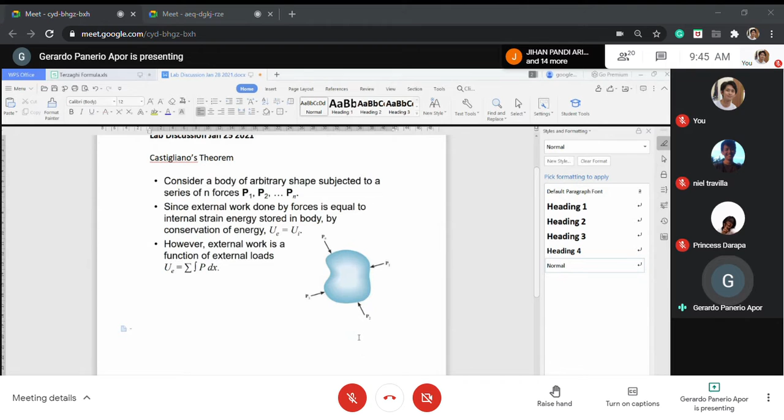So we have here a body, color blue, subjected to a number of arbitrary forces, such as P1, P2, up to P sub n. Now we are going to consider the external work here.

The external work done by these forces is equal to the internal strain energy stored in the body. So as long as there is external work done on it, there's also internal strain energy stored in the body. There is transmission from external work to internal strain, just like our human body: if we do external work, we will have some internal strain energy stored in our body.

Now, by conservation of energy, the external work done is equal to the internal work done. However, external work is a function of the external load. So, based on the simple equation, U subscript E is equal to U subscript I.

So the first equation, U sub E, is already defined, because this is what we call the external work, and this is a function of external load, such as P1, P2, P3. So in simple equation, it is the integral of P dx, because force times distance is work. P times the integral of dx equals work.

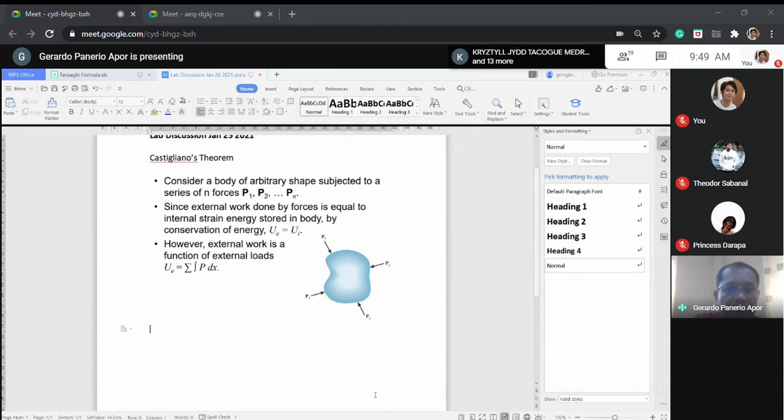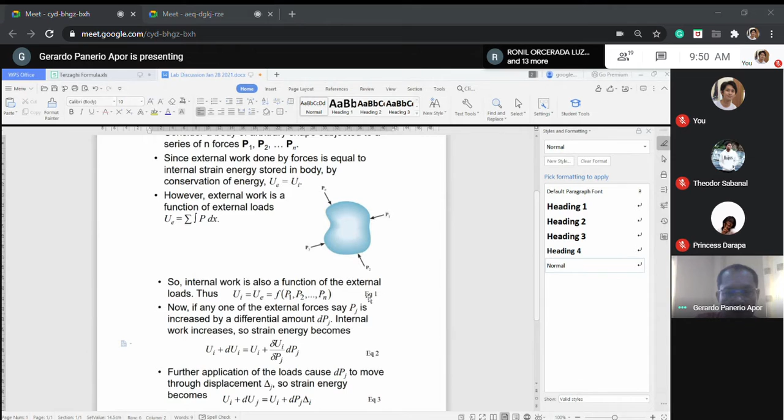So the internal work is also a function of the external load. Thus, U sub I equals U sub E equals a function of P1, P2, Pn. So that is equation 1, which I put on the right side.

Now, if any one of the external forces, say P sub j, is increased by a differential amount of dPj, the internal work also increases. So strain energy becomes U sub I plus dU sub I, or equals U sub I plus the partial derivative of U sub I with respect to P sub j, multiplied by dPj.

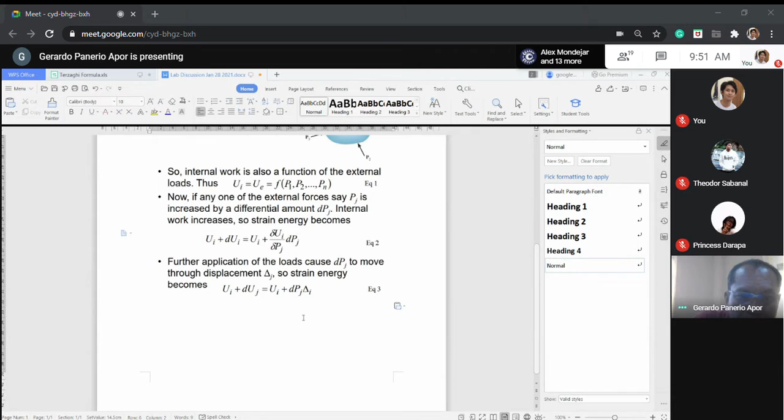Now, further application of the load causes dPj to move through displacement delta j. So strain energy becomes U sub I plus dU, or equals U sub I plus dPj times delta I. So you now have an equation for U sub I, which is the expression of increased internal strain energy. We will continue.

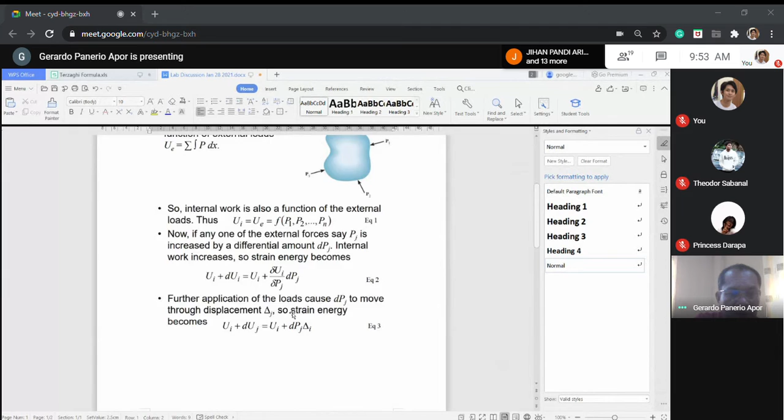So dUj actually becomes dPj times delta I, from this equation, because U sub I on the left side of the equation from equation 3, and the U sub I on the right side of the equation, both cancel, leaving only dUj equals dPj times delta I. This is the additional strain energy caused by dPj, the increase of the external load dPj. Here we try to increase by an amount dPj, and we see what the change in internal energy will be.

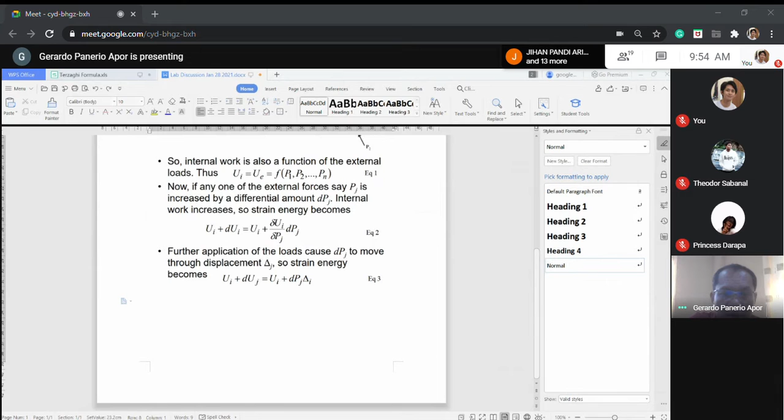This one will be equation 3. Okay, I think this one is workable. Actually, I'll just erase the 14 because that's from the book.

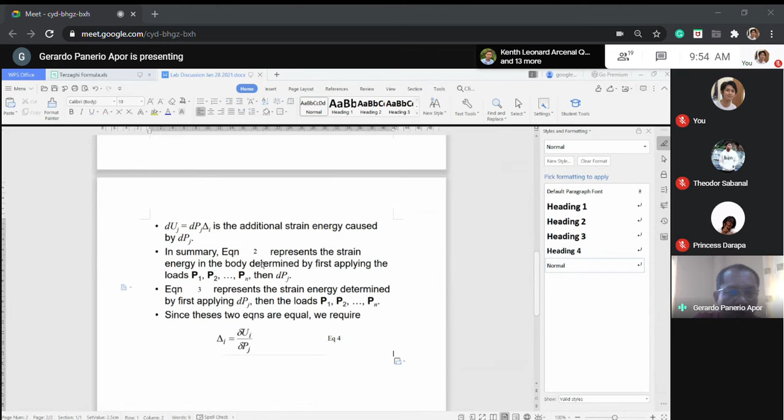So in summary, equation 2 represents the strain energy in the body determined by first applying the loads P1, P2 up to Pn, then the increase of that external load. Equation 3 represents the strain energy determined by first applying dPj, then the loads P1, P2, Pn.

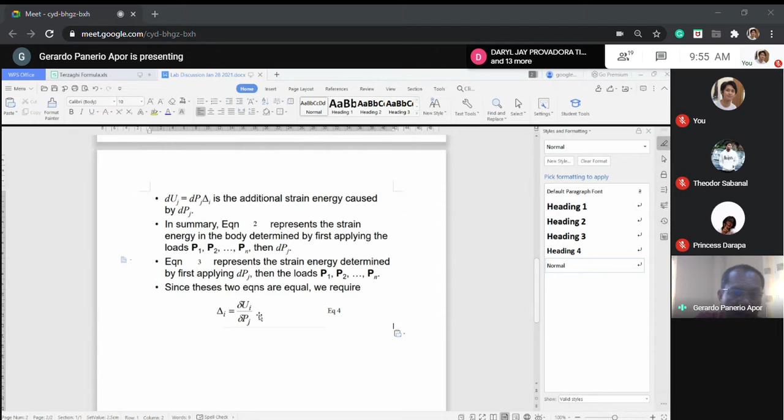Since these two equations are equal, require that delta I equals to partial of Ui over partial of Pj. So this is equation 4. I think this is now the Castigliano's theorem. Okay, so I will.

Okay, so it says here that equation 4 is a statement regarding the body's compatibility requirement since it's related to displacement. So the derivation requires that only conservative forces be considered for analysis.

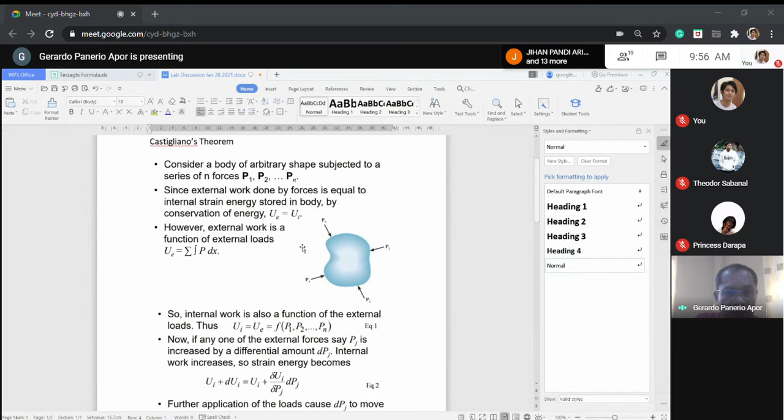Okay, so we go back. We have a body applied with a force. So we apply the conservation of energy such as external work is equal to internal work. So you have equation for the external work and for the internal work.

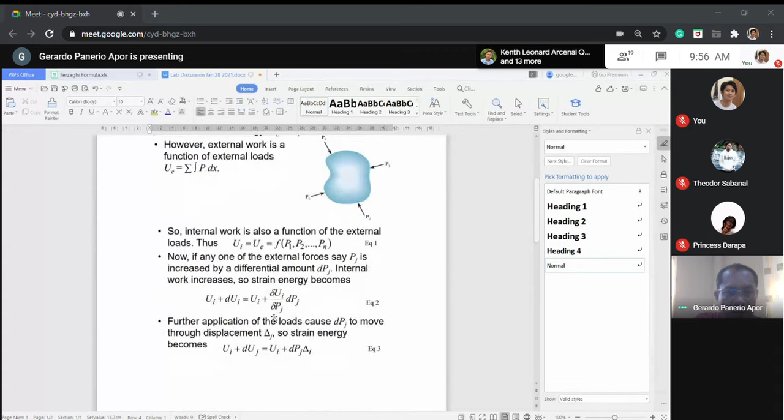And then they also apply the derivation by increasing the amount of differential force, so there's also a corresponding increase in the strain energy. That involves derivatives, that's why you see a lot of delta here. That means that we are applying derivatives.

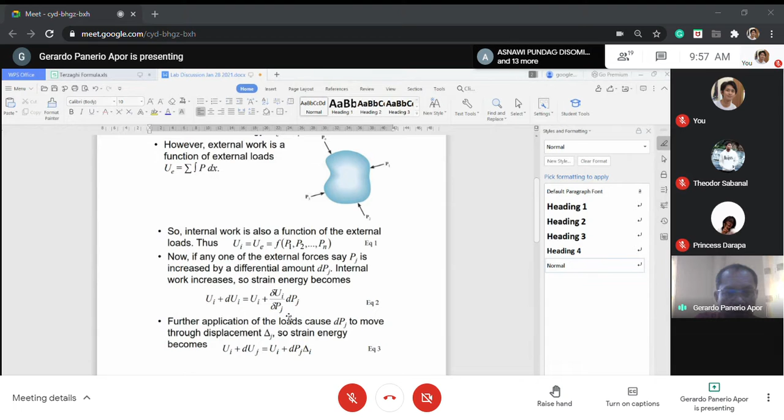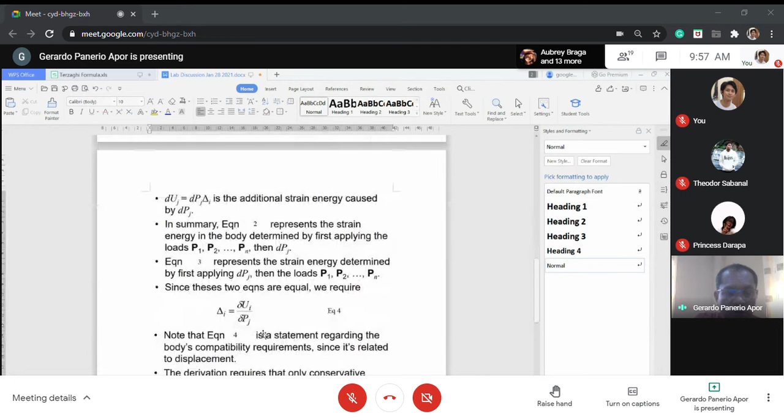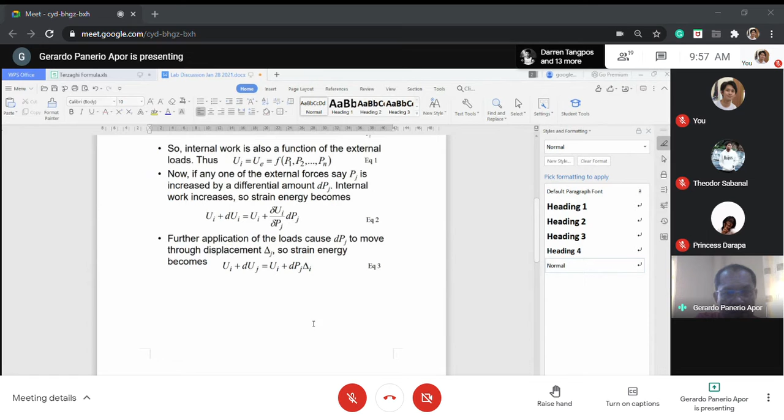So from this somewhat long equation, we will have only a simple equation in terms of equation 4. So this one is simpler to look at rather than this equation. But if you notice the equation, so many terms will cancel. So we have equation 4, which is a statement regarding the body's compatibility requirements.

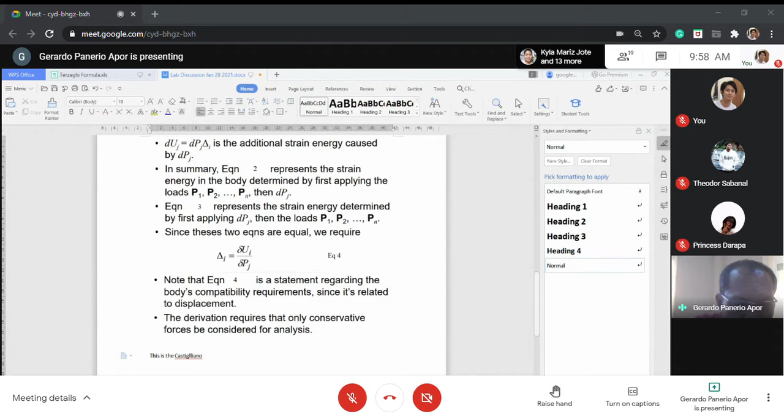We continue. Okay, this one is known as the Castigliano's Theorem. So this is the Castigliano's theorem. Castigliano's theorem, okay, so the equation 4.

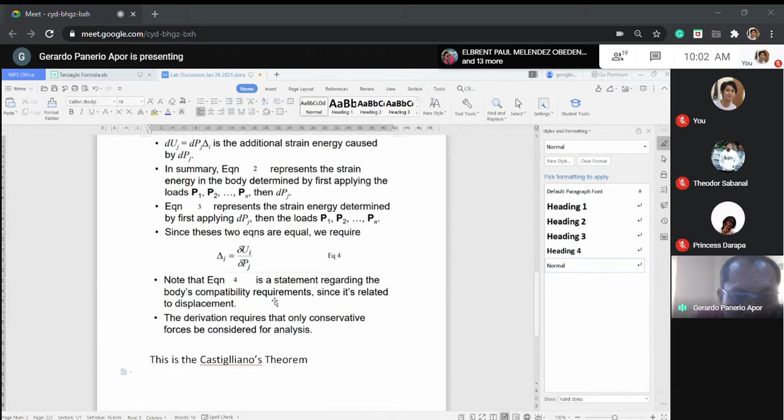Okay, so this is the Castigliano's theorem. So we can apply this actually to the truss. Application of it, for example, deflection of truss. Deflection of truss is one of the applications of the Castigliano's theorem.

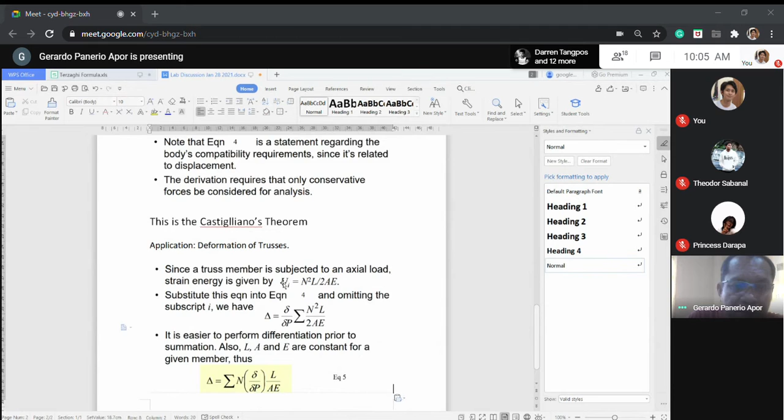The internal energy in the truss becomes axial, and that equals Ui equals N squared L over 2AE, no? Where A is the cross-sectional area. I will define here: A is the cross-sectional area of truss, area of truss member.

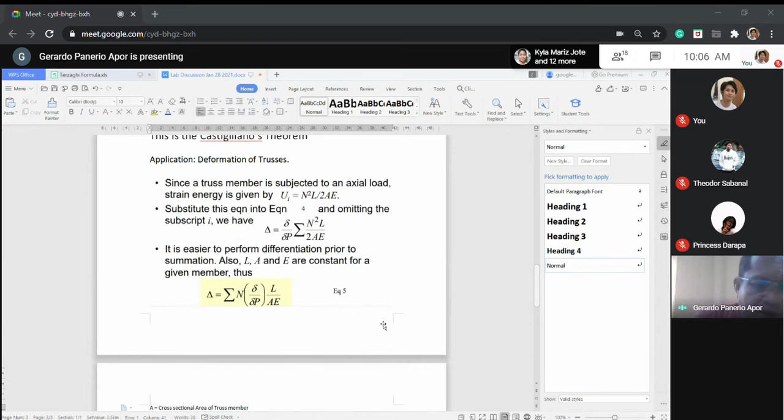Now we assume that all members have the same area, so that's why only one A is used, and E is the strength of the material, no? Which is usually defined as the modulus of elasticity of the truss member, whether it's made of wood or made of steel.

And we have also in here, what is that N? Let me see what that is. Another term there is L, as the length of the truss member. So the length of the truss member is L, E is the modulus of elasticity, and A is the area of the truss member.

Okay, how about the term N? What is that N? Okay, I think that's the force, no? So, okay, this is the formula. This is now the formula for the truss, no?

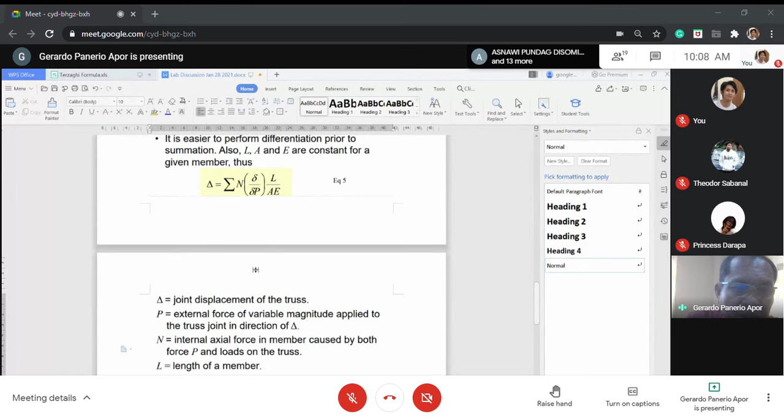So from this equation 5, delta is the joint displacement of the truss. P is the external force. So we will write equation 5 below, and the definition will follow.

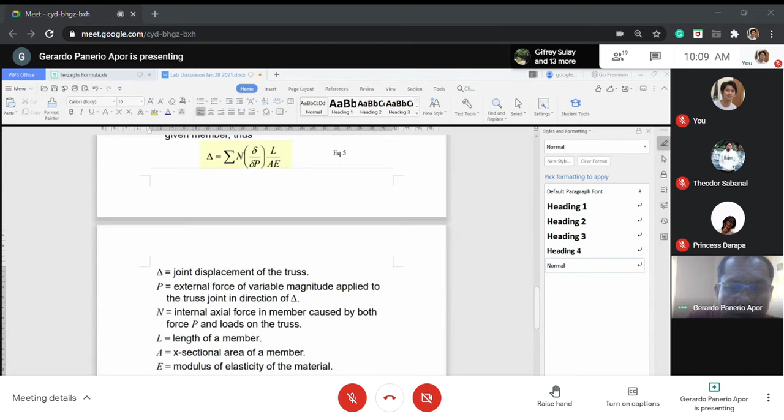Okay, so actually if we apply the partial derivative of the function with respect to P, the only thing that can be derived here is N, no? Because L, the area, and the elasticity are considered constant, so they will not change. So only the force, so only delta N over delta P, no? So what will happen is...

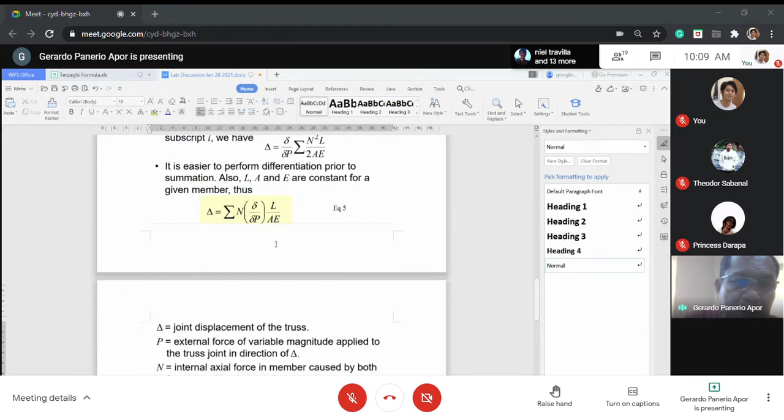So we can, okay. So there's another.

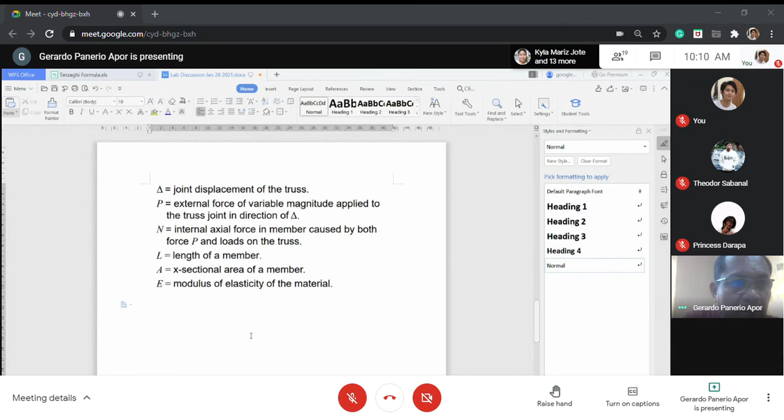Okay, so in order to determine the partial derivative delta N over delta P, because as I said, from this equation the only variable that can be derived is N, not L, not A, not E. So we need delta N over delta P. So N is the internal axial force in the member caused by both the force P and the load on the truss, no? That's N.

Internal axial force, no? So meaning we have to determine it before, using what's called the method of joints, no? Or method of sections, just to determine the internal force, no? Because N is the internal force.

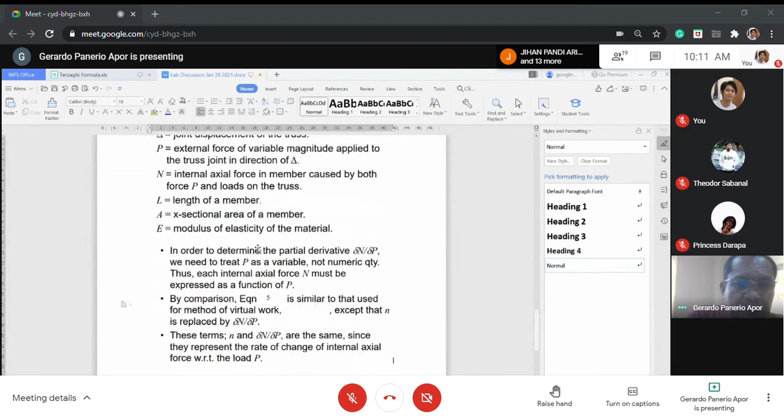P is the external force. So in order that we can determine the partial derivative delta N over delta P, we need to treat P as a variable, not a numeric quantity. Thus, each internal axial force N must be expressed as a function of P.

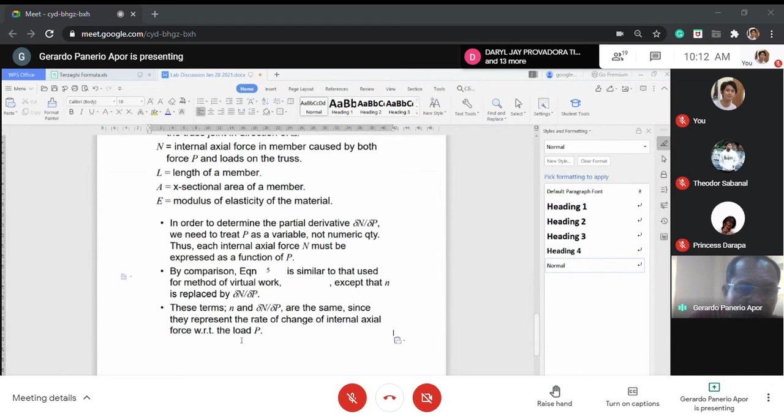By comparison, equation 5 is similar to that used for the method of virtual work, except that n is replaced by delta N over delta P. These terms, n and delta N over delta P, are the same, since they represent the rate of change of the internal axial force with respect to the load P.

Okay, so we continue. Okay, so we have the procedure for analysis. We have the procedure for analysis. Procedure for analysis, this is it.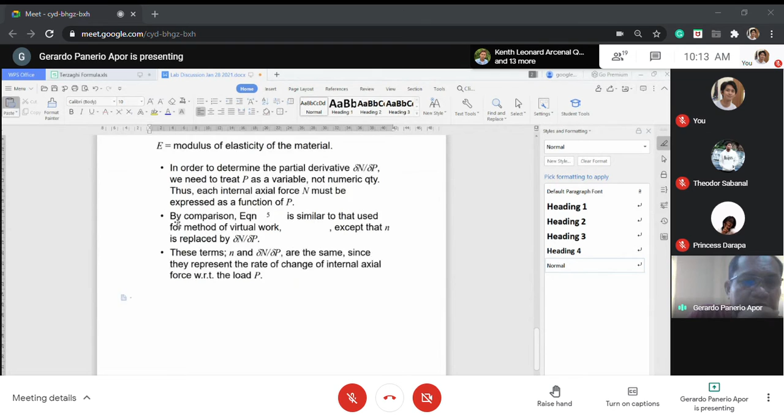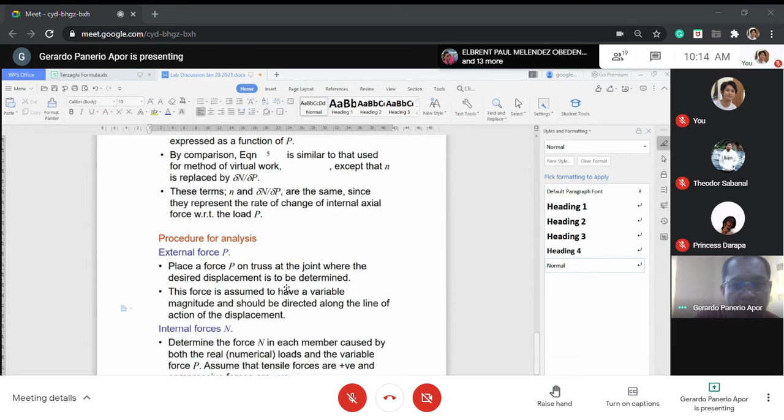Procedure for analysis: External force P. Place a force P on the truss at the joint where the desired displacement is to be determined, no? It's very important. This force is assumed to have a variable magnitude and should be directed along the line of action of the displacement. So not only is the force placed at the joint where you want to determine the displacement, but the direction of the force P is also the same as the direction of the desired displacement you are going to determine.

Okay, how about the internal force N? Determine the force N in each member caused by both the real numerical load and the variable force P. So there are two analyses to do, no? Determine the internal axial force in each member caused by, number one, the real loads, no? The real loads are the actual external loads.

And the variable load is the one that you place on the joint. The displacement is to be determined. What is the direction of the P? It is the same direction as the one you are going to determine.

So there will be two types of load. Number one is the real load, the one acting on the trusses. Number two is the P, which is actually a determinant force, just to determine the displacement.

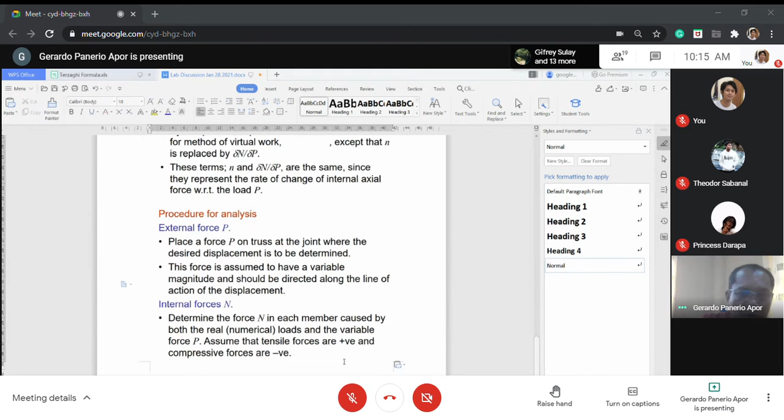So that's the procedure. I think we need to have an example. If we have an example here, we still have to continue with the procedure of analysis.

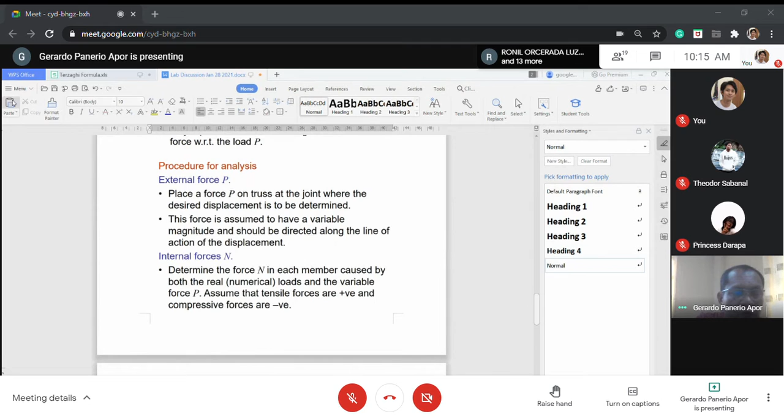So we continue. For the internal force, find the respective partial derivative delta n over delta P for each member. After n and delta n over delta P have been determined, assign P its numerical value if it has actually replaced the real force of the truss. Otherwise, set P equal to 0.

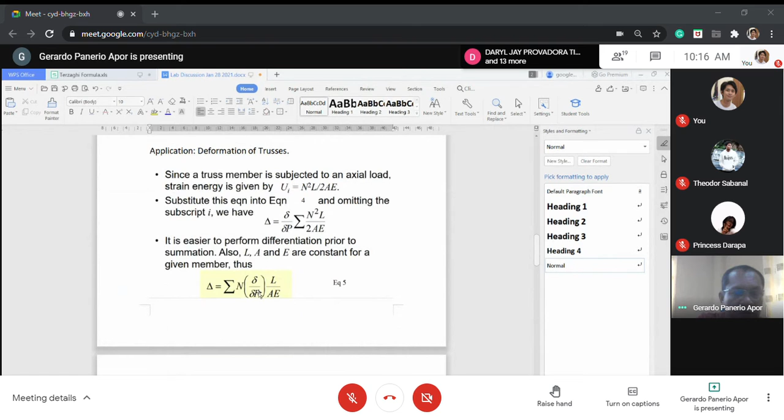This is known as the Castigliano Theorem. I don't know where is the first one, but we will come to that.

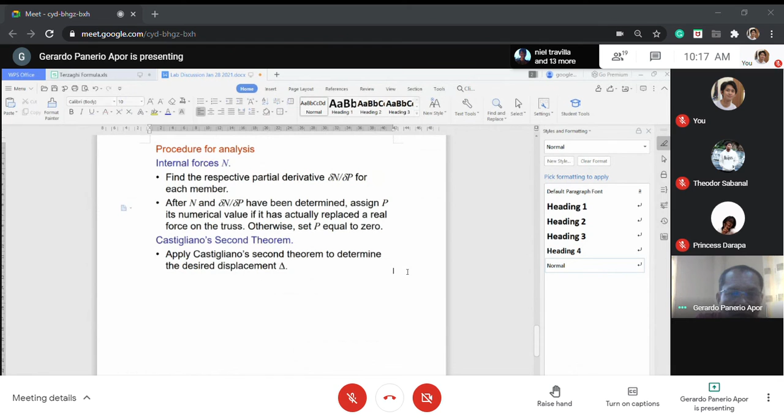Continuing, it is important to retain the algebraic sign for the corresponding value of n and the partial derivative of n with respect to P when substituting this term into the equation. If the resultant sum of n times delta n over delta p is positive, the displacement is in the same direction as P. If negative, the result is opposite to P.

That is the meaning, just like when we assume a positive sign in the method of joints when analyzing internal forces of truss members. The first thing, when we do a free body diagram of every joint, for members we haven't determined yet, we assume the arrow going away, meaning we assume them to be positive. If the result is positive, then that force is positive. If we get a negative, that means compression.

But the magnitude is okay, magnitude will not change if the sign changes. Only that axial force is directional, you have a tensile force and also a compressive force. So we can determine tensile and compressive force by its direction, because force is a vector.

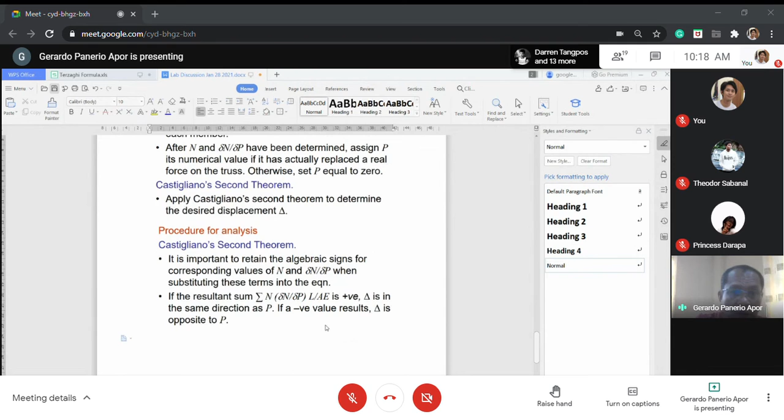So actually there's a lot here, but the most important is equation 5, because equation 5 is known as the Castigliano second theorem. That's what it's called, the Castigliano second theorem. We use this in determining the displacement.

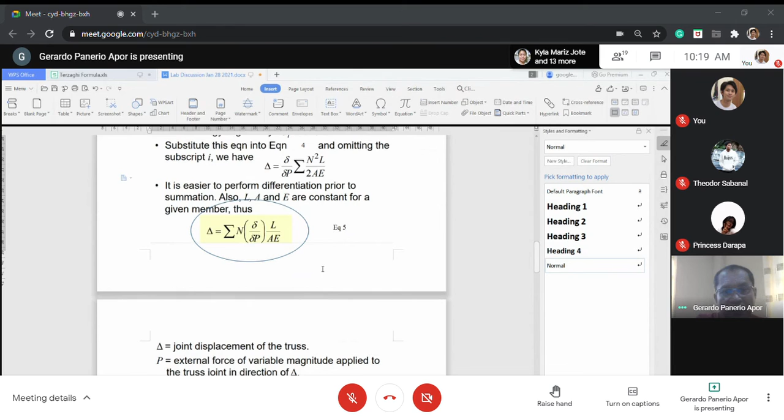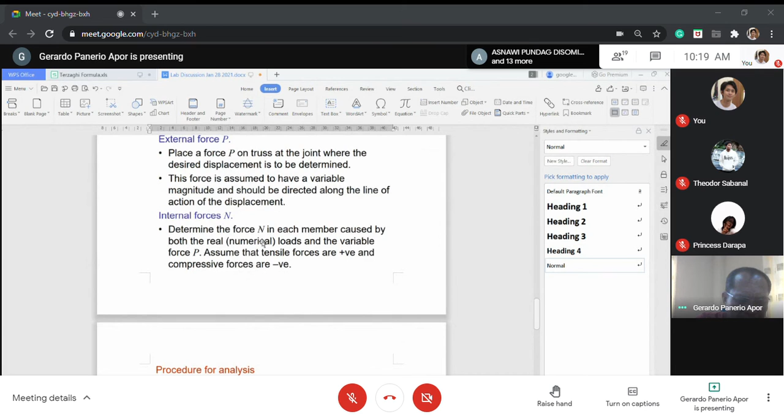But when you determine the displacement, you follow this procedure. This procedure is easier done than said, or easier said than done. It's like that.

So I think I need an example now, just like this one. Example number 16.

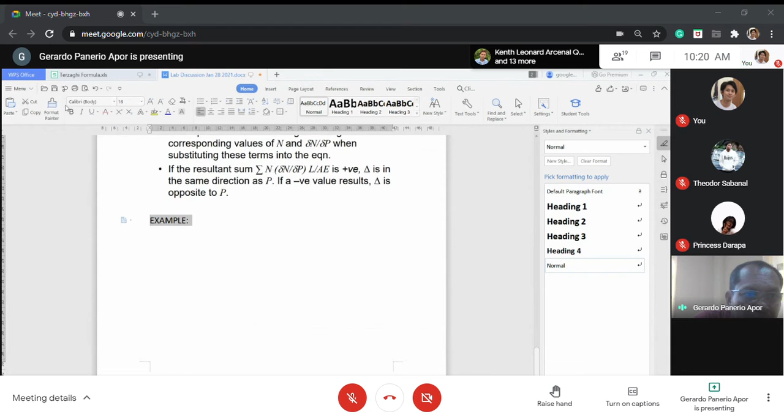Determine the horizontal displacement of joint C of the steel truss shown. Actually it has four members. The truss, I see, is all pinned connections.

Now the height of the truss is 4 meters from A to B, and A to D is 3 meters. So A to C is 5 meters because this is a 3-4-5 triangle: 3 horizontal, 4 vertical, the hypotenuse is 5 because 3 squared plus 4 squared is equal to 25, and the square root of 25 is 5.

Now the area of each member is different. You have a bigger area for AB and CD, while a smaller area for BC and AC. This means the areas of the truss members are not the same, but they are made up of the same material, with a modulus of elasticity equal to 210 gigapascal.

This is already gigapascal, 210, because Newton per mm squared is megapascal. Newton per meter squared is pascal. Kilonewton per meter squared is kilopascal. But when we say Newton per mm squared, that is megapascal. Now if we multiply this by 1,000, that will become kilonewton per mm squared, and kilonewton per mm squared is gigapascal. So that means this is 210 gigapascal.

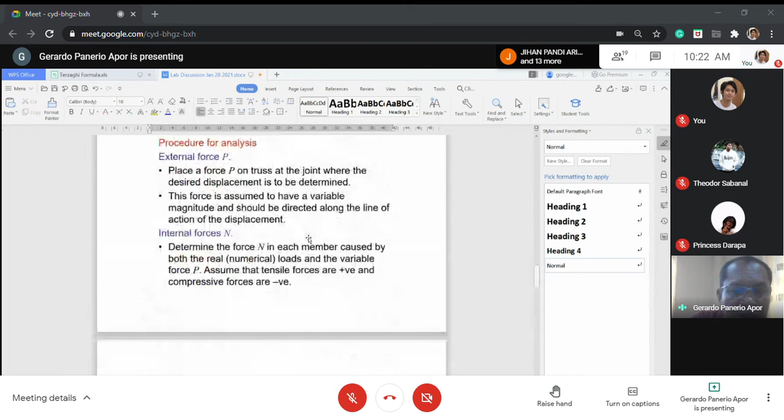To determine this, if you examine the formula, I will cut the formula here. So I'm going to consider this.

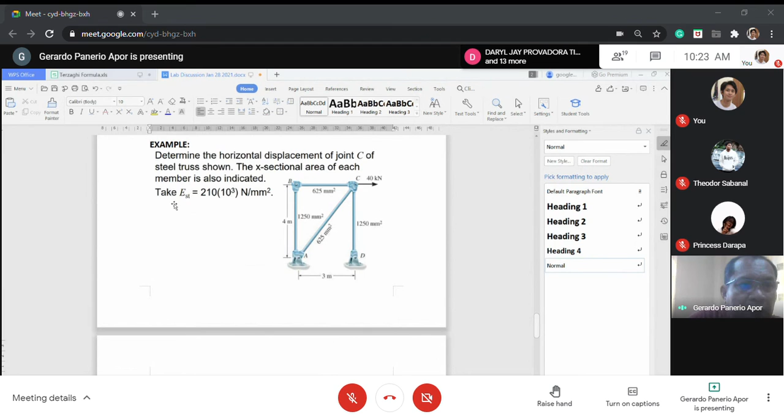That's how many there are, let's see it. So first you are going to determine the N, because you need the L, you need the area, you need the E. I think we need the...

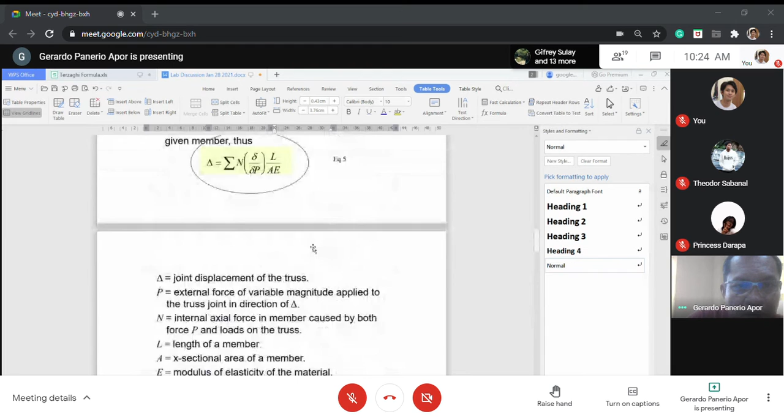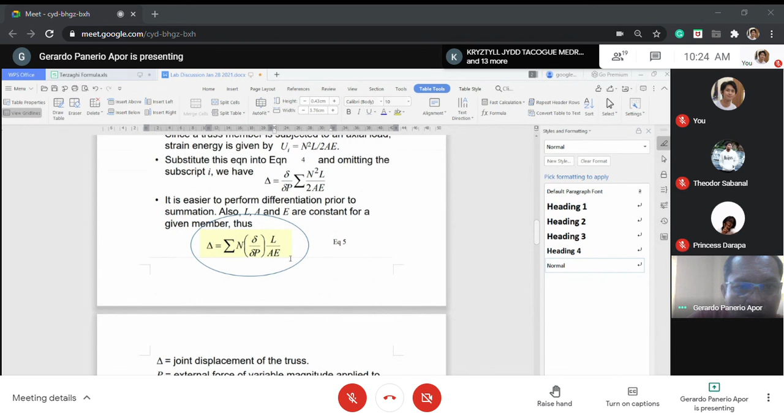I think this one is lacking, this equation is lacking. The equation that I posted is lacking. Inside the parentheses, it's supposed to be delta N, delta P.

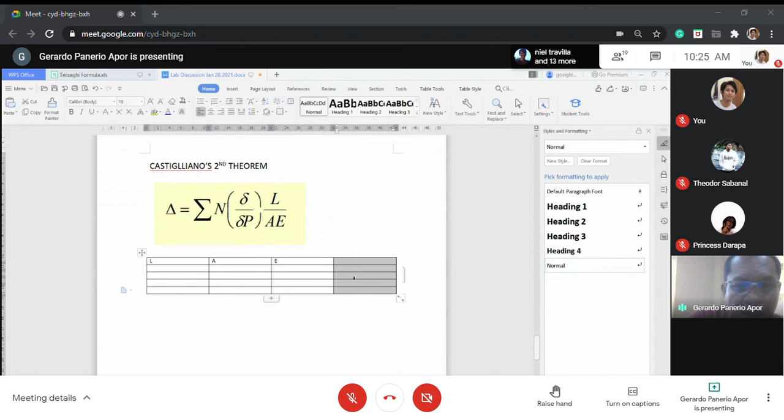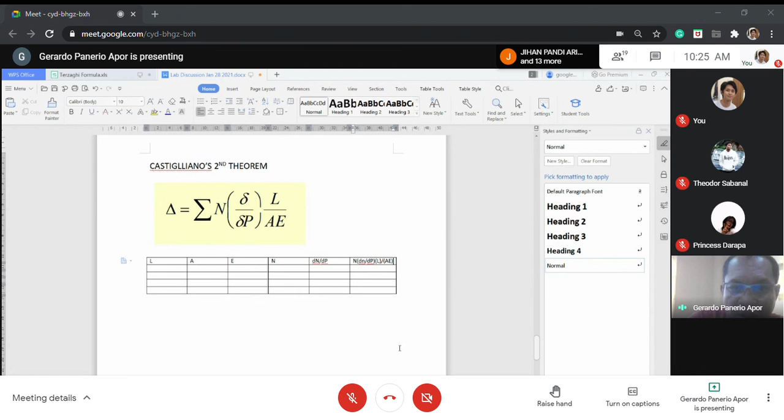So you still have to add another column, insert column to the right, and we need another column inserted to the right. First you need the N, next you need dN/dP, and we have the sum, that you have N multiplied by dN/dP multiplied by L divided by the product AE, where you get it: first column, second column, third column, fourth column, you perform this.

You perform this, like for example N times dN/dP, so it's just a product of these two. Then if you include L, you multiply by L, you divide by this one. So I will add another column here as the identification of the member, insert columns to the left so we just see the member.

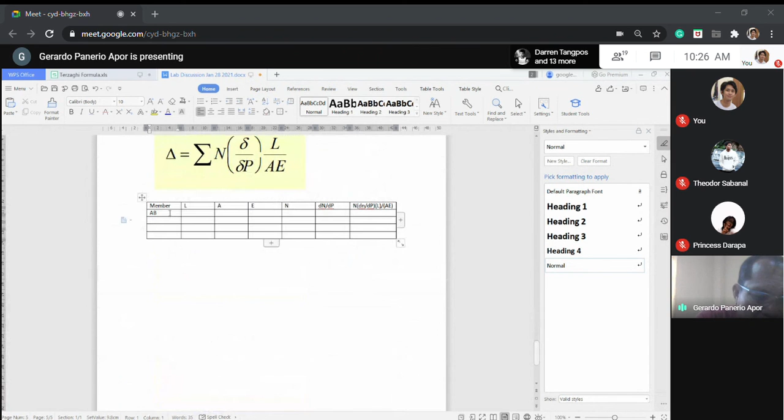The first member is AB, next is BC. All the members, I've said how many members there are. BC, you have also AC. I think, so wala. AB, BC, AC, CD. CD, what about CD?

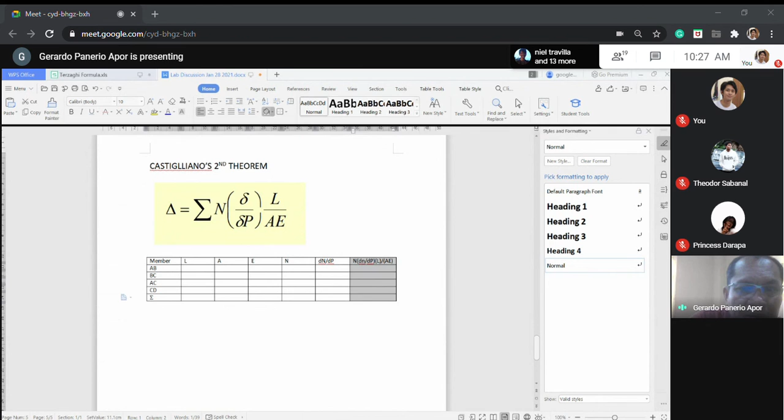Hindi, I'll add you one there. So we need a summation, so insert a row, insert row below, and this is for the big S, you see summation. That means that if we are going to sum all of this value, if we sum all of that value, okay, we are already performing this.

But this one is actually wrong, I will change this equation. So how will I change that? I'll just insert an equation, it's easier to type. Equation.

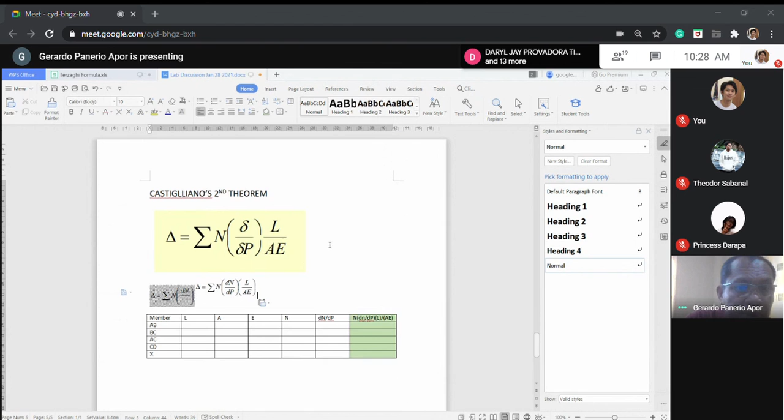So first you have delta is equal to summation, then you have the N, then the product of dN and dP, then you have the product of this one, L and AE. Okay, so I will just copy and then paste that here.

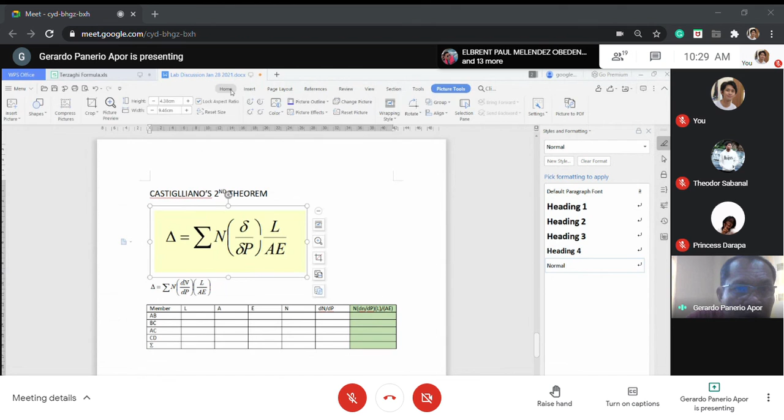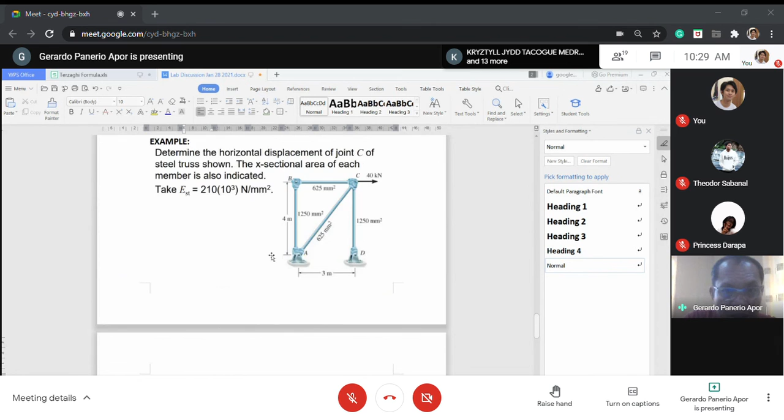Okay, this also, because it lacks. So this is the equation actually. Since we do not have time, we cannot fill all the cells here now. BBL, yeah, because it's there now. So like AB that's 4 meters, and BC is 3 meters, and AC is 5 meters, and this one is 4 meters. So I'll just fill up the first, what I did here is I just fill up the first, second column. So that's it, area, elasticity, like that. Elasticity also is 210 gigapascal, you can fill that the same all over.